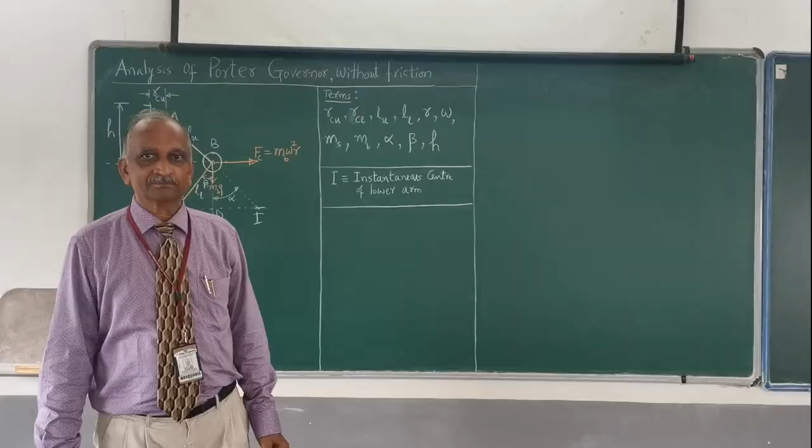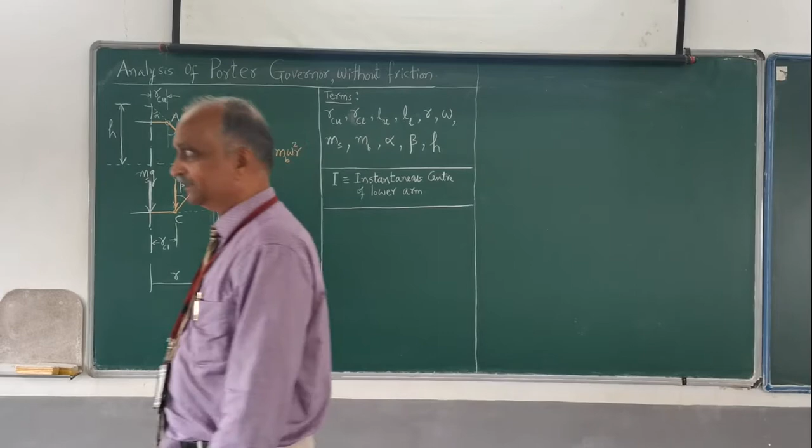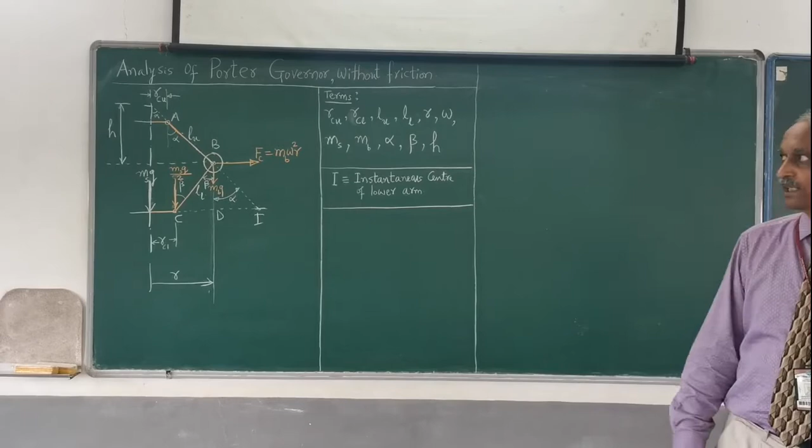Professor Pavan has introduced you the topic governor. You already know what is governor. Governor is an attachment to a prime mover which will help to run the prime mover at a constant speed. Why constant speed, etc., I shall keep it, and if necessary, I shall come back.

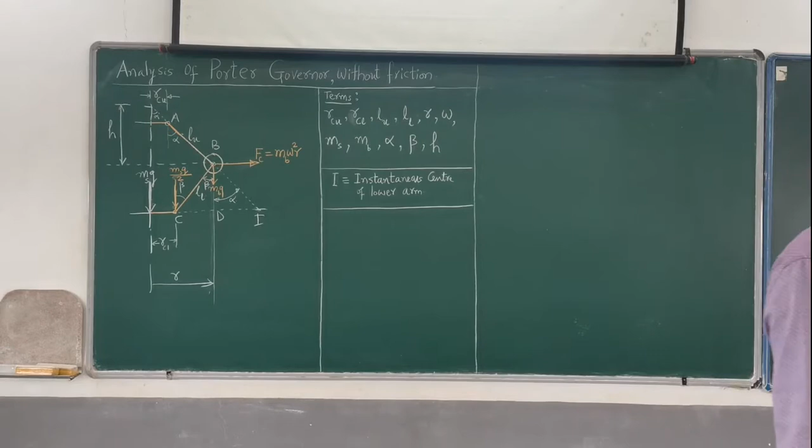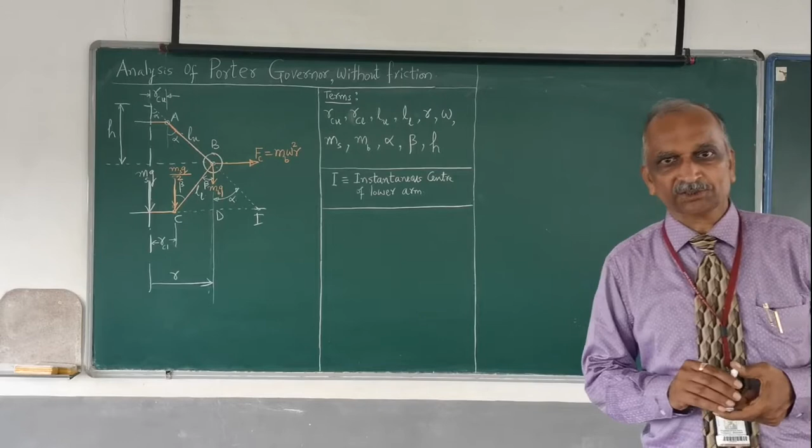So we all have understood the requirement of the Porter governor in general, and we have two types of governors: centrifugal governor and inertia governor. Centrifugal governors are very common because they are very easy to construct, but inertia governors are not that easy to construct, therefore they are not that common.

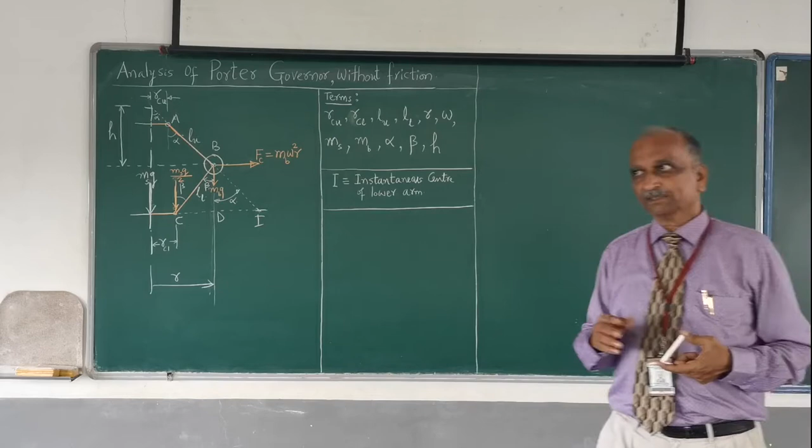So in centrifugal governors there are a variety of types depending upon the construction, but as per our syllabus we are supposed to discuss two types of governors. One is called as Porter governor, the other one is called as Hartnell governor. Both of them are called as loaded governors.

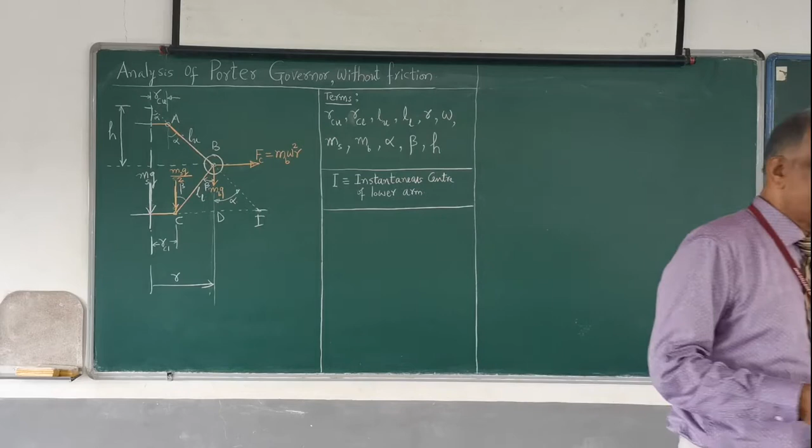And what is the meaning of loaded governor and what is unloaded governor? Probably I shall take it up maybe in your notes, through notes, or I shall explain it sometime later.

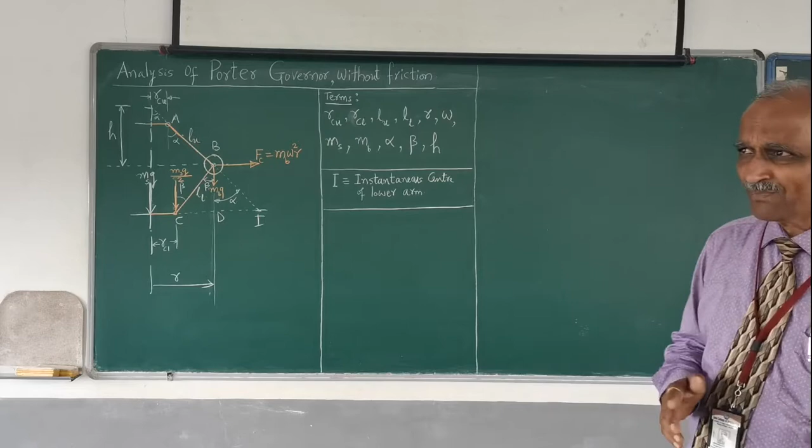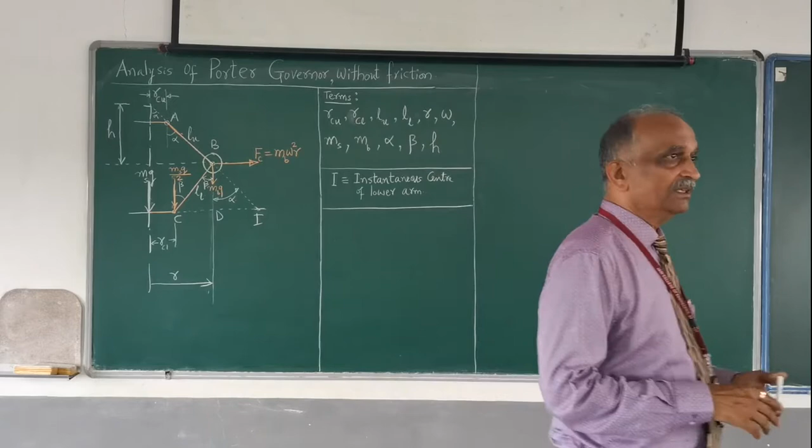So now I would like to take up the discussion of Porter governor. So any centrifugal governor, we all know that essentially every centrifugal governor shall have a spindle, a sleeve and a skeleton, which will carry what is called as governor balls.

So I have drawn only half of the Porter governor here. This is the Porter governor, only half of it I have drawn because only half of it I will be considering for the analysis purpose, and you have exactly the symmetric thing on this side.

So this line indicates the governor spindle. I have represented it by only axis. The complete spindle has not been shown, and even the arms. The upper arm, this is AB the upper arm and BC the lower arm, and this portion is what is the sleeve. So this is the construction of a Porter governor which I have shown.

Please observe it carefully here. This is the axis, and imagine that this is the collar at the upper end, and this collar is not going to move at all, either up or down. It is not going to slide, it is fixed.

And similarly, I have a sleeve. This sleeve will go up and down depending upon the speed of the governor balls. And this is what we call it as A, B, C.

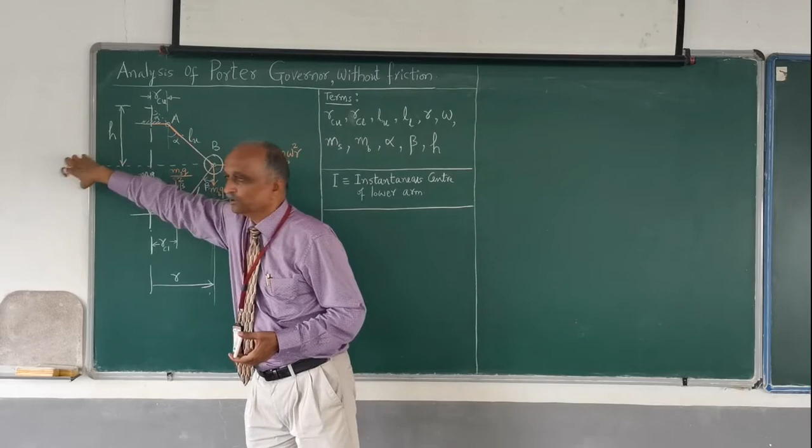And similarly, on the other side also we have this side, and the upper arms and lower arms and the collar, all that together is what is called as the skeleton. And this is what is called as governor ball 1 I have shown, and a similar thing you have on the other side.

Please see here, some of the construction whatever is required for the analysis has been shown here. The governor means this is the fixed part which is fixed to the spindle, and this is the upper arm, this is the lower arm, this is the sleeve, and this is the ball.

Now let me assume that the spindle is rotating. The governor spindle is rotating and as the upper arm, this collar is fixed to the spindle, the whole skeleton also will be revolving.

So let me assume that the governor spindle is rotating at a constant speed. Why is it running at constant speed? Because this governor spindle, which is connected to the shaft of the prime mover, and the prime mover is running under a constant load, and therefore the speed of the prime mover is constant, and hence the speed of the governor spindle is also constant.

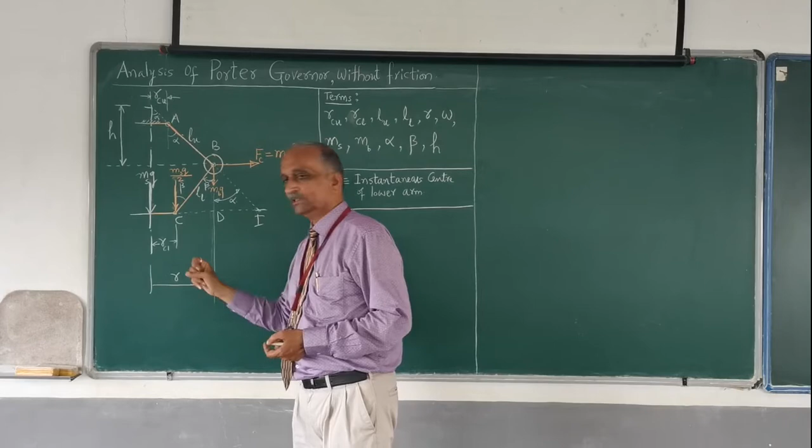And this governor balls are revolving at a constant radius. Say this is r, the radius of rotation. It is rotating at a constant angular velocity.

Since these balls are not moving either outwards or inwards because of the constant speed, I can say that these balls are revolving at a constant radius. With respect to the horizontal movement in this plane, these balls are in an equilibrium state, and therefore I can easily apply what are called equilibrium conditions. That's what I am going to do in this analysis.

So before I go to that, I have a few terms that will be useful for solving problems later on. The analysis I carry on is not with any purpose of deriving any expression or equation. My aim is to show how to analyze any Porter-Governor problem. Though sometimes I may use the final expression, I wish to treat this method of analysis for solving every numerical problem we will take up later on.

So before I proceed, I have a few terms. One is called RCU, radius of collar at the upper end. This distance, the upper arm is hinged away from the axis, so this distance I get as RCU, and I am showing the analysis with RCU as some distance. But sometimes in numerical problems RCU may be 0, in which case this point A is also on the axis of the spindle.

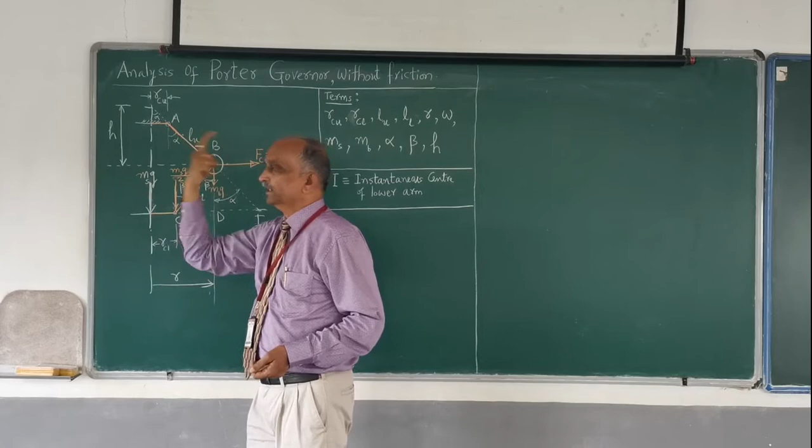This is the axis, this is the ball, and this is the plane of rotation of the balls. These balls are revolving in this plane, which I call the horizontal plane of rotation of the balls. The distance between the axis and the center of the ball is called the radius of rotation of the ball. Omega is the speed at which these balls are revolving, in radians per second.

And all these distances are in meters to have consistency later on, though they may be given in millimeters, centimeters, or any other unit. When we start substituting in a numerical, we wish to convert it to meters so that we do not commit any mistake in the consistency of the units.

MS, mass of the sleeve, this entire sleeve - I am considering only half of the sleeve here and half of the sleeve here. This is the entire sleeve, and this sleeve is of mass MS, expressed in kg.

And MB is the mass of each ball. I am taking one ball here, the other ball is on this side, and MB is the mass of each ball, also in kg.

Alpha is the angle made by the upper arm with the axis of the spindle. So the extension of this angle is alpha. I have drawn a line parallel to the spindle, and therefore this angle also is alpha. Alpha is the angle made by the upper arm with the spindle axis.

Similarly, beta is the angle made by the lower arm with the spindle axis. This line is parallel to that, and therefore this angle is beta.

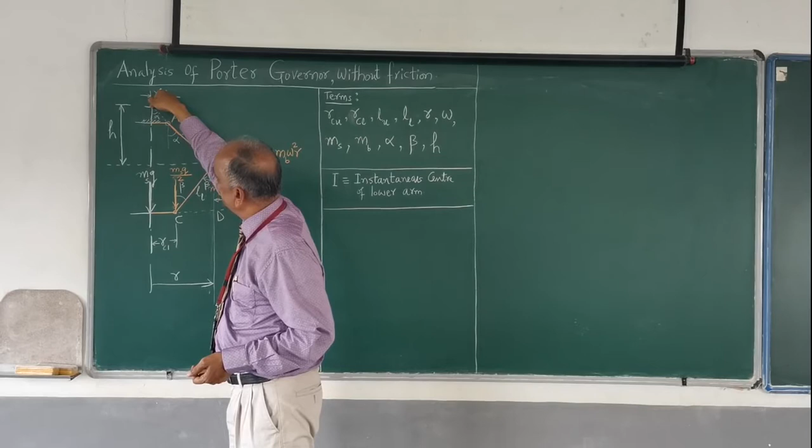And H, a very important term - this is the distance between this point and this. What is this point? This point is the intersection of the upper arm with the spindle axis. This is the spindle axis, this is the upper arm, the extension of the upper arm, and this is the point of intersection with the spindle axis. This point and this - and what is this? This is the plane of rotation of the balls.

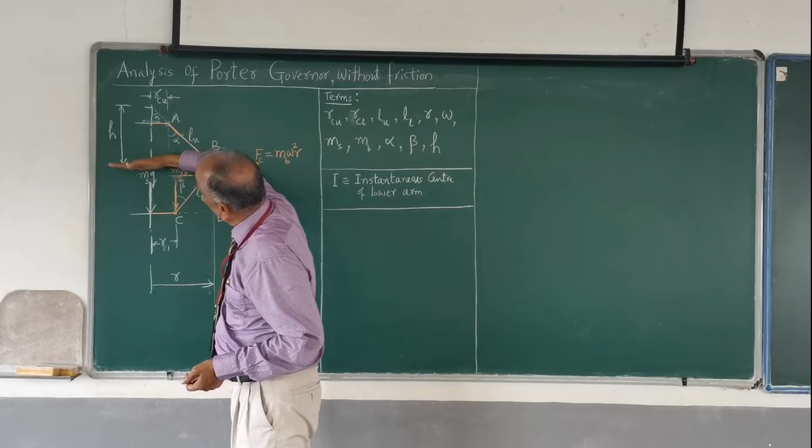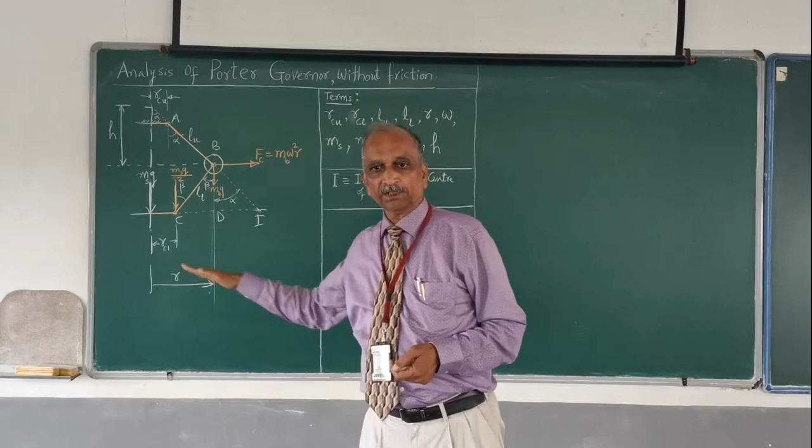The distance of the intersection of the upper arm with the spindle axis from the plane of rotation of the balls is known as the height of the governor. This is a very important term, and we call it the height of the governor.

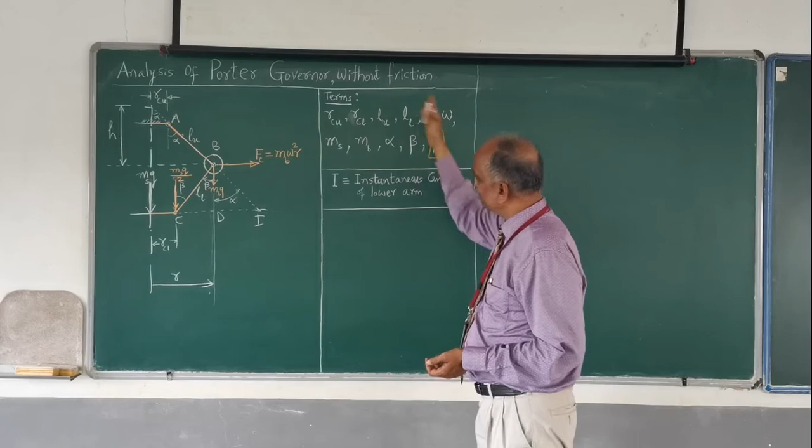Knowing and being familiar with all these terms, now I can go for what is called analysis. So when I mean analysis, I am going to relate all these terms, and when we take up a numerical, some of these things are unknown, and that is what we are going to find out.

So now, before I proceed, I make a small construction here. I extend the upper arm, and similarly I extend the sleeve.

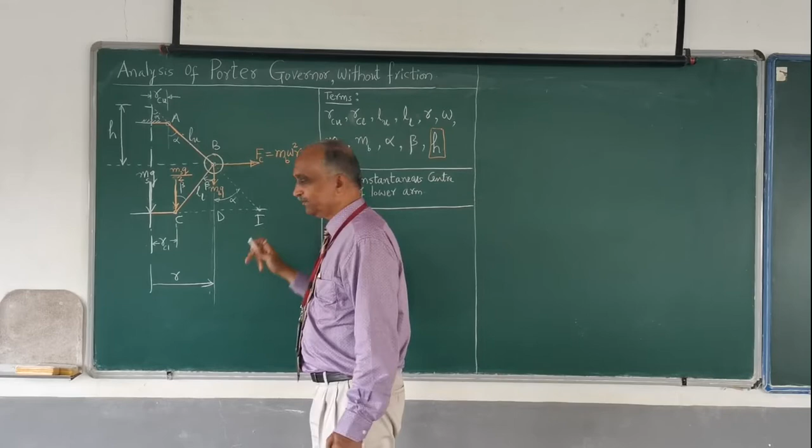The intersection of the sleeve and the upper arm is what I denote by the letter I. I is very familiar - in kinematics of machines, we used to call it the instantaneous center. So I is known as the instantaneous center of the lower arm. I don't want to go into why it is called that, I shall proceed further.

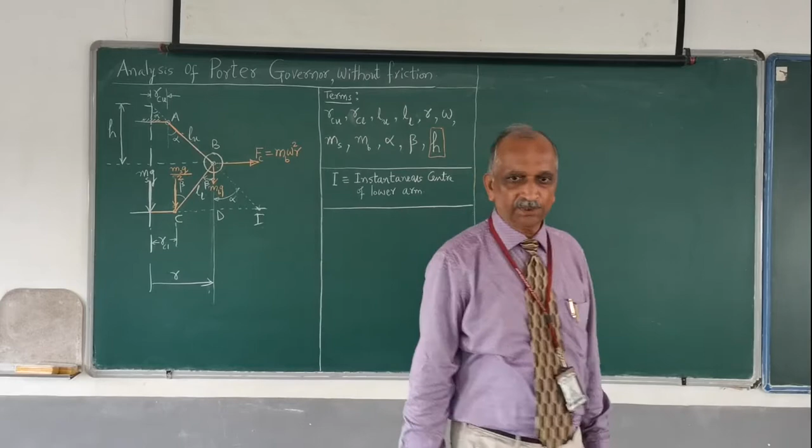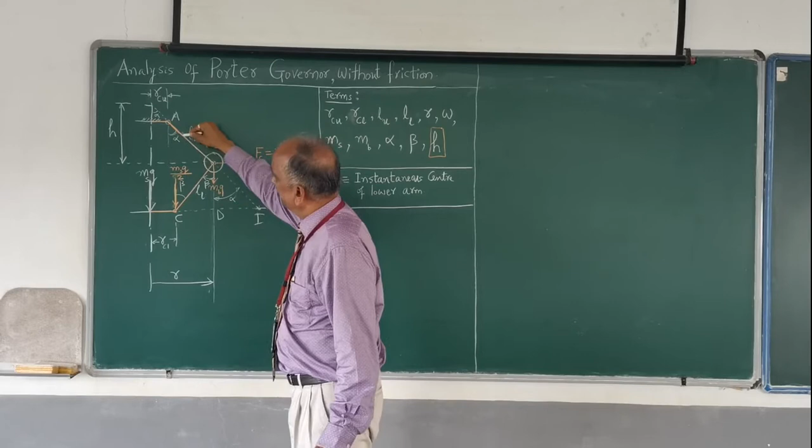So now one more small thing. This angle is alpha. This line is parallel to this, and this is the extension, therefore this angle is also alpha. On the same lines, this line and this line are parallel, and this is beta and this is beta.

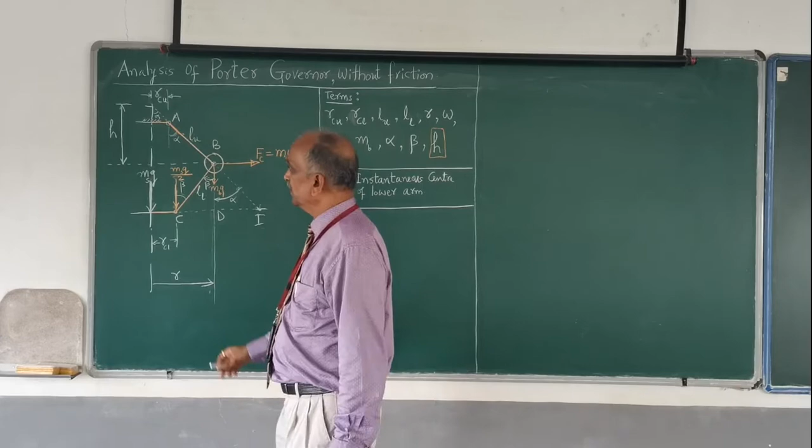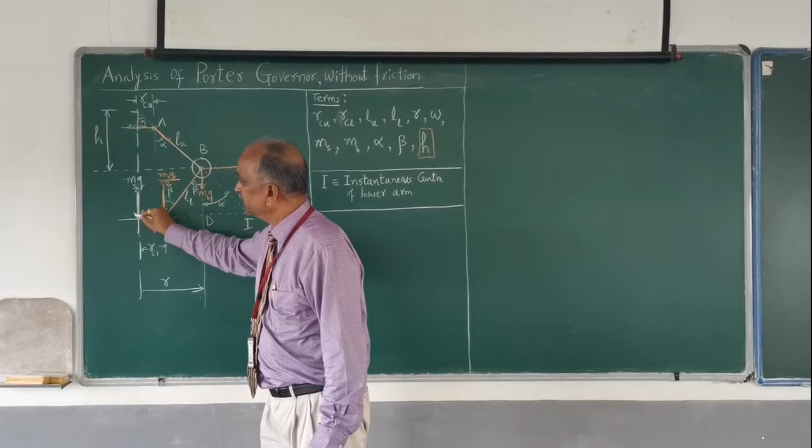Before I can start applying the equilibrium condition, one small last thing. I know that the mass of the sleeve is ms, so the weight of the sleeve is ms multiplied by g, acting imagined at the center of the sleeve. This ms into g, I can resolve into two halves - half part coming here, and another half part coming this side.

So I am not considering the other half, therefore I shall be considering only this half. Therefore, the weight of the sleeve I have to consider is only ms into g by 2. This is one force.

Then each ball has mass mb, therefore it has weight acting vertically downwards, so mb into g is the vertically downward force acting at point B. This point mass, revolving at a distance r and rotating at omega, has a centrifugal force Fc, which is equal to mb into omega square r. So these are the only three forces acting on it, and this ball is in an equilibrium state.

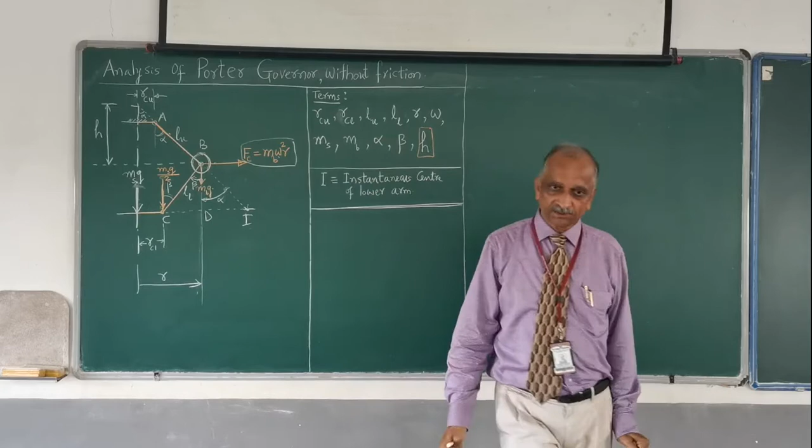So now I know the equilibrium conditions. One of the equilibrium conditions is that the sum of the moments due to all the forces is zero, and that is what I would like to apply - sigma M about point I is equal to zero.

This is what I would like to write down, and I write down the corresponding moments, etc. And that's what I say is analysis.

So now, the moment due to Fc about point I is equal to Fc multiplied by the perpendicular distance BD, and this is forming a clockwise moment.

Then the moment due to the force ms into g upon 2 multiplied by Ci is the anti-clockwise moment. Then mb into g multiplied by di is also called the anti-clockwise moment. So there are two anti-clockwise moments and one clockwise moment, and they have to be balanced.

That's what I am going to write down. First let me write the anti-clockwise moments: ms into g divided by 2, multiplied by Ci, plus mb into g multiplied by di, is equal to mb into omega square into r, multiplied by bd. This is the moment equation.

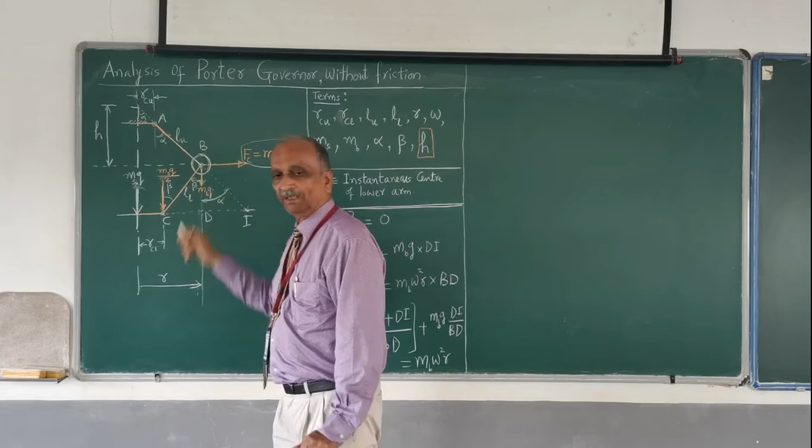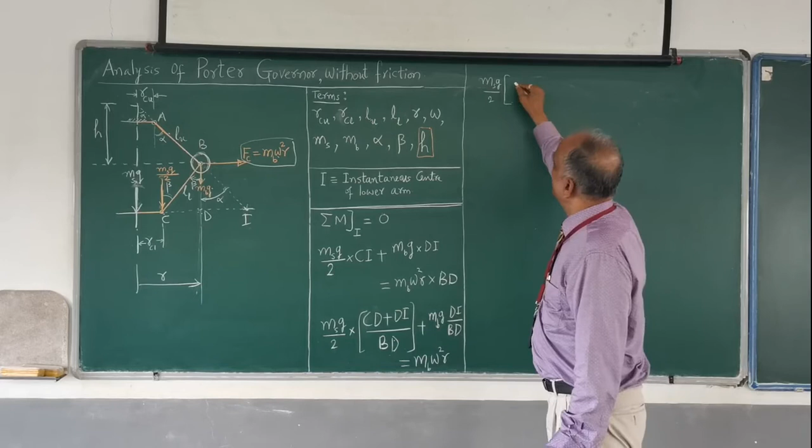So I can simplify this as MS into G divided by 2 into, this term I am separating it, CD upon BD plus DI upon BD. CD upon BD is nothing but tan beta, plus DI upon BD, this angle is alpha, therefore this is tan alpha. So tan beta plus tan alpha.

So plus MB into G, so DI divided by BD, DI divided by BD is tan alpha, tan alpha. This is equal to MB into omega square into R.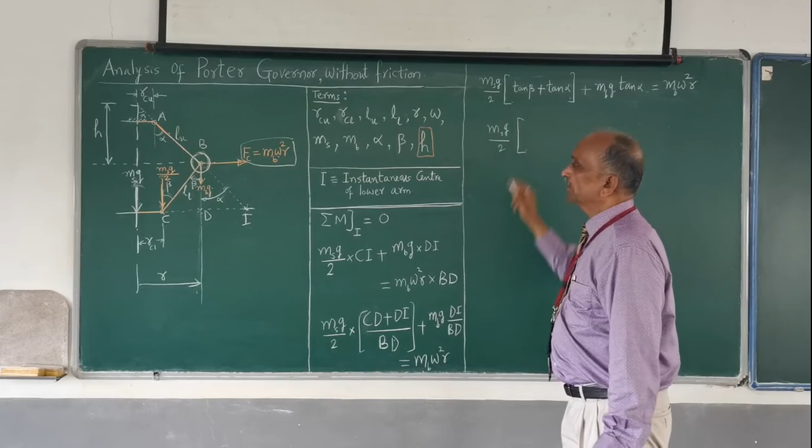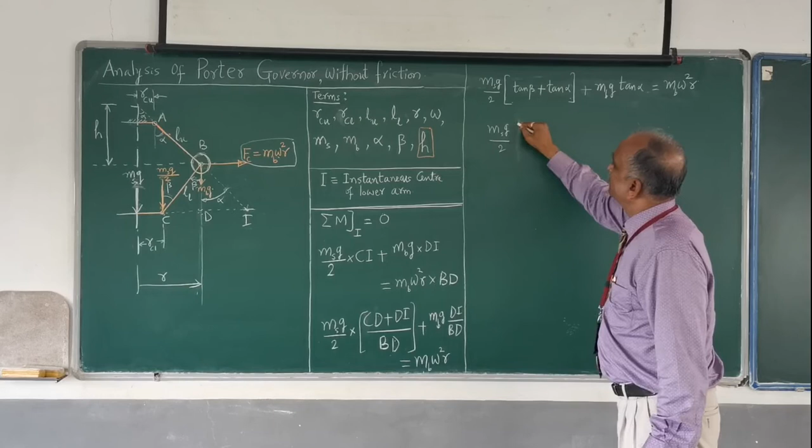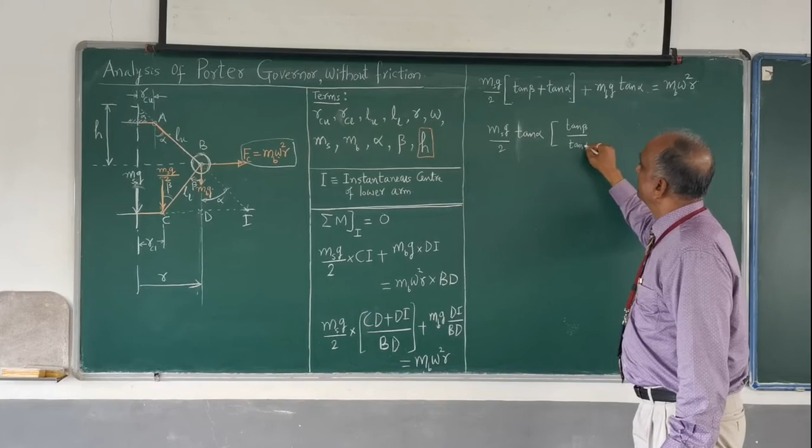Okay, so now MS into G divided by 2. What is tan beta? Tan beta and tan alpha. Before that, I would like to take tan alpha outside here, tan alpha. So if I do that, it is tan beta divided by tan alpha, from this term, plus 1.

Plus, so MB into G into tan alpha is equal to MB into omega square into R. From this term, here also tan alpha is common, therefore I shall take tan alpha outside.

So this is going to be MS into G divided by 2 into bracket. This I write as 1 plus tan beta divided by tan alpha, I shall write it as K. So 1 plus K plus MB into G, the whole thing, this is equal to MB into omega square into R. Okay, tan alpha, go back here.

So I would like to make use of this triangle. This angle also is alpha. Alpha is opposite side, this is R divided by this value, this is nothing but H. So tan alpha is equal to R divided by H, into bracket.

Okay, so probably I should just reshuffle this term. MB into G, this term I am writing first, plus MS into G divided by 2 into 1 plus K, the whole thing. And this is equal to MB into omega square into R.

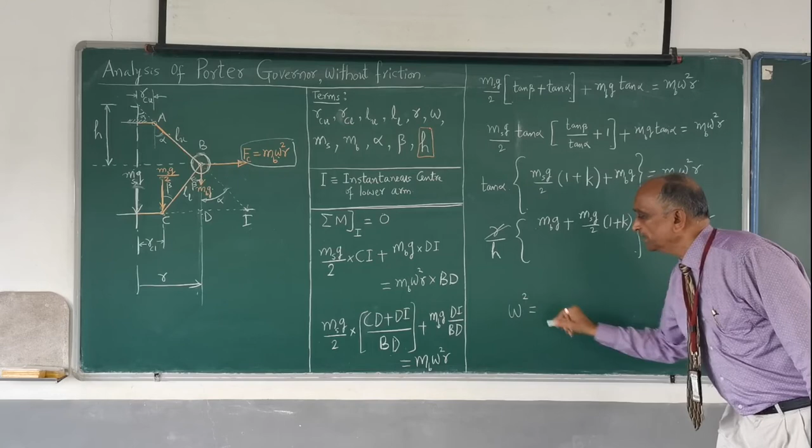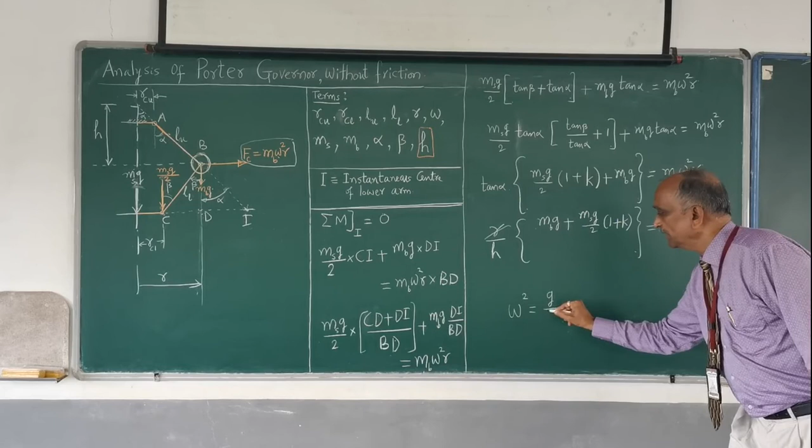I can cancel this R and R. Keeping omega square here and the rest of the things, this MB also I send it to this side, and therefore write an expression for what is called omega square is equal to, and this G also I can take outside here, so G divided by H. Omega square is equal to G divided by H into bracket, MB plus MS into 1 plus K divided by 2 into bracket, MB.

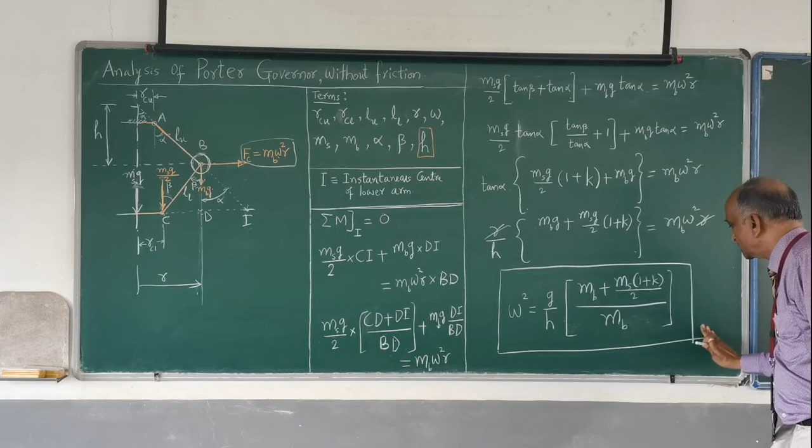This is the expression for the speed of the governor, and whatever this speed is, we call it equilibrium speed, because the governor balls are revolving at a constant speed. It is in equilibrium position, the sleeve is not moving upwards or downwards, and it is in equilibrium position, and therefore this speed is called equilibrium speed.

Now omega square I have. If you want to get omega, then whatever you simplify this and take the square root, you get omega, that is in radians per second. Of course, MB, MS are in kgs, and G is meter per second square. H is the height of the governor, this is also in meters.

Then if you are not happy, or the problem requires the speed in RPM, from this omega you have to find out, convert it into what is the speed in RPM, and that speed is called equilibrium speed.